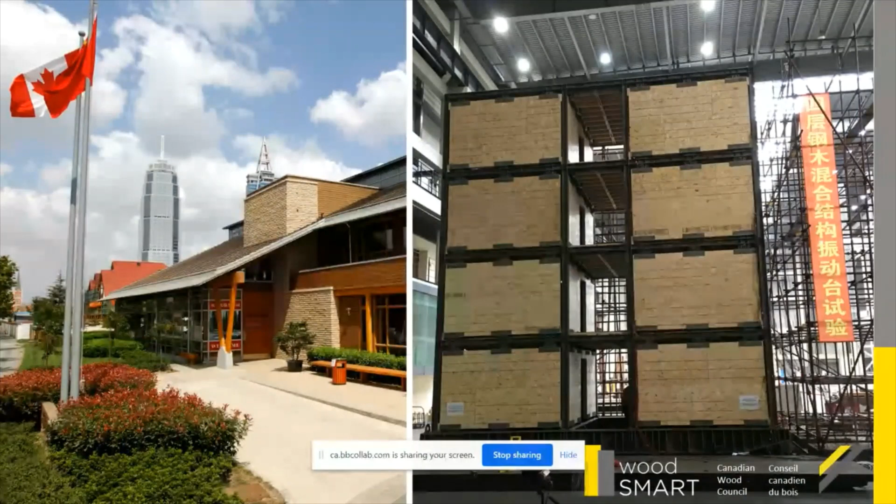I also had the privilege of living and working in China for a number of years. When I first arrived in China, I worked for an agency of the BC government that had built an office in Shanghai. You can see that on the left side of the screen. Basically, we were promoting the use of wood in China and encouraging Chinese to buy Canadian lumber. So that was pretty exciting.

Today, China has many examples of both leading edge mass timber projects, like the Qingdao Pearl Visitor Center, which I'll talk about at the end of my talk, and very basic construction in the form of bamboo scaffolding. You can see on the right side there, just bamboo lashed together with wire. It's simple but effective.

Also, while I worked in China, I was employed by a Finnish company that produced engineered wood products in Finland and sold them all over the world. They produced glulam, plywood, LVL and sawn lumber, and they're quite a large manufacturer. While I worked for them, I became quite familiar with how they constructed with wood in Northern Europe. So I've been fortunate to have seen wood construction in different parts of the world.

So for my presentation today, I thought I would start by talking about the current trends in the construction market overall, then talk about some projects in Europe that demonstrate industrialized construction processes, and then I'll talk about some projects in Canada.

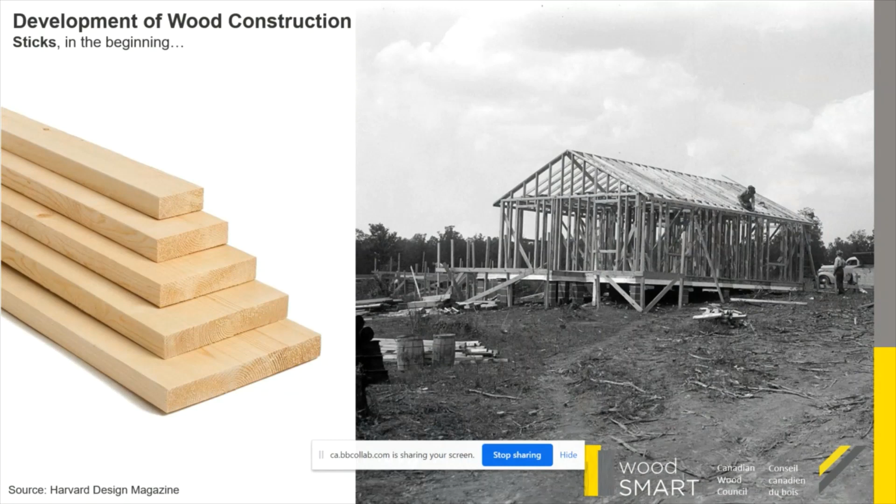Things advanced a little further from just sticks to panels, wood-based panel products like OSB, or oriented strand board, and plywood. And this enabled more complex structural systems like shear walls and floor diaphragms, and combined with engineered wood products, has enabled increasingly larger and taller wood structures, as well as increased their performance.

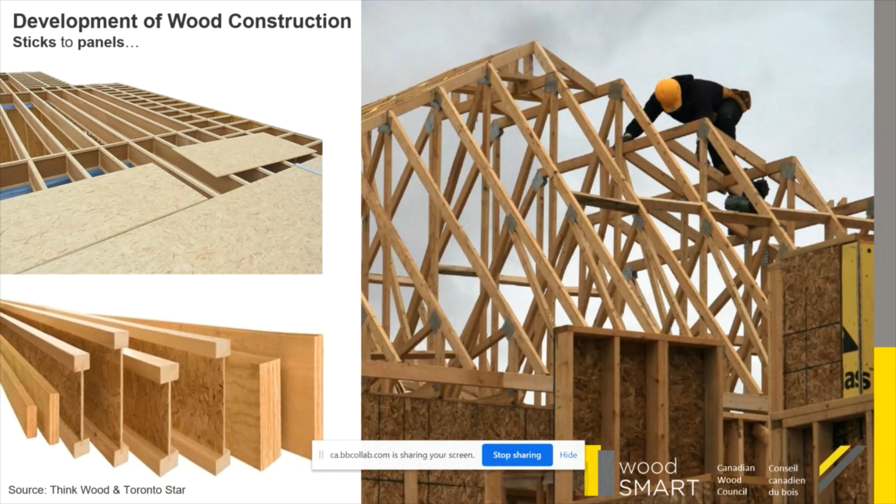And now we've advanced even further with mass timber elements. So these are things like glulam, where dimensional lumber is glued together in a number of layers to create a kind of homogeneous member, and cross-laminated timber, which is kind of a buzzword these days, which is dimensional lumber in alternating layers that create these large panels. Similarly, dowel laminated timber and nail laminated timber can create these large panel elements.

And so this is great because they can act like large plates, and in some instances can have two-way capacity if required. Highly processed products where the naturally occurring defects in wood, like checks and splits and knots, can be controlled and removed. And the quality of the finished product can really be assured.

These can also come in the form of large elements that are made in a factory to very tight tolerances, and they can have holes to accept connections, like you see on the right side there, and also have holes and routing for MEP to be installed on site, so you don't have to do that ad hoc on site. And these elements can be craned into place.

Shipped to the job site and craned into place immediately, and suddenly you can erect the floor of an office building in 1 week. No formwork is required. You don't have to tie rebar. There's not 100 concrete trucks disturbing the neighborhood. You don't have to wait weeks to strip the formwork and then reshore. So mass timber can really represent a new kind of construction.

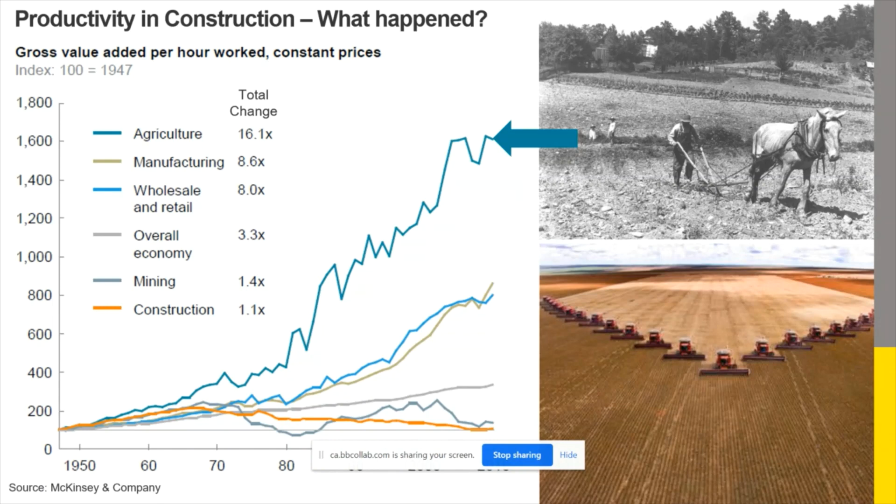So the blue line at the top there is agriculture. Productivity in agriculture has improved 16 times in 70 years. So you can imagine a farm in the late 40s looks vastly different than a farm of today. They've leveraged scale through land assembly and automation, and advanced bioengineering to increase crop yields.

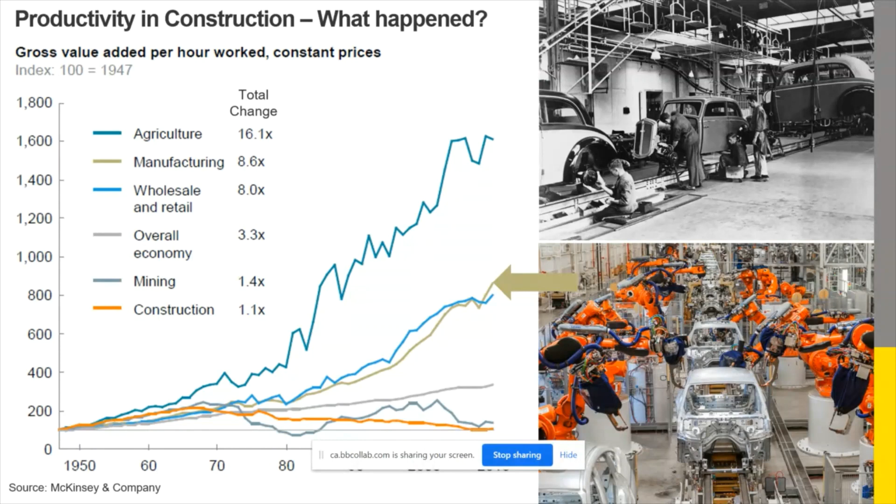Similarly, automotive manufacturing has improved almost 9 times. They've implemented new concepts of flow and standardized designs, and really aggressively automated to increase production capacity. So, an assembly line in the 40s, there were a lot of people, and it was quite slow. Whereas today, there's robots everywhere, and it's quite a fast, efficient process.

Likewise, retail has improved about 8 times in productivity. Walmart today is vastly different than 1940s Walmart. We think of cutting-edge logistics to provide affordable goods to the masses, online shopping, and other changes.

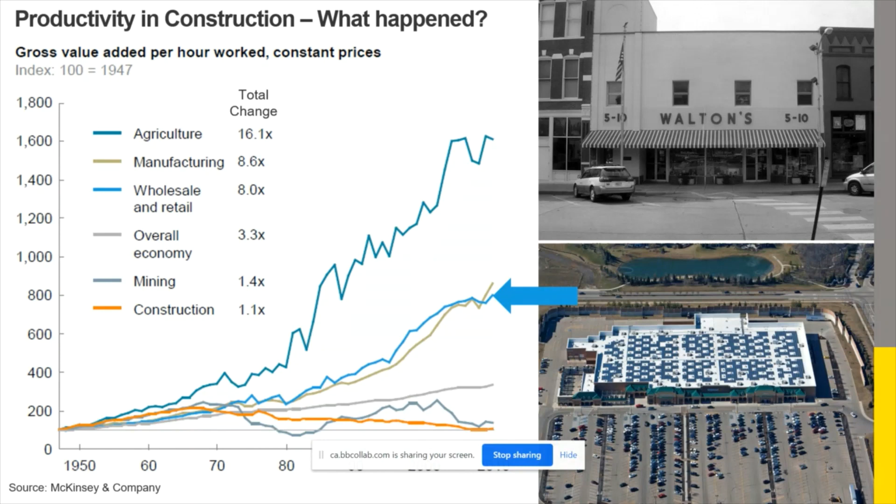Meanwhile, construction, the orange line at the very bottom, has improved only 10% in the past 70 years. And most of that advancement was between 1947 and 1970, likely because of the introduction of power tools and equipment to the job site. So think electric drills and pneumatic nail guns and things of that nature. And since 1970, it's actually declined in productivity. So it's almost embarrassing.

And for context, we can consider the Empire State Building, the design, planning, and construction of which took just 20 months from preliminary design to occupancy, and the actual structure itself was erected in only 410 days. Using a crew of about 3,400 people each day, they assembled its skeleton at a record pace of about 4.5 stories per week, using kind of an assembly line process, and the project was finished ahead of time and under budget, which is pretty rare these days.

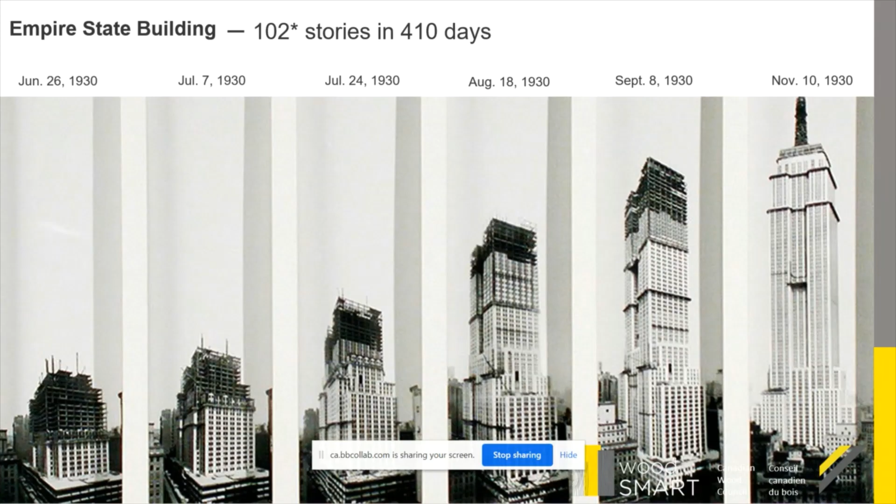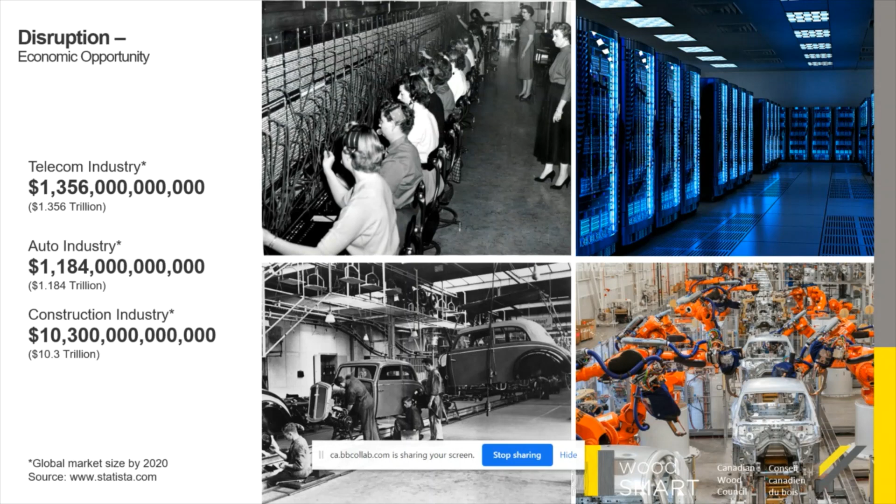And it's important to remember how inefficient construction is when we consider the size of the market. Globally this year, the construction industry will be worth about $10.3 trillion, about 4 times the amount of the auto industry and the telecom industry combined. So it's a huge market, and there's a lot of money to be made, and not a lot has changed in well over 100 years to make it more efficient and make it better. And really that means there's huge economic opportunity, especially if you can figure out a way to build faster and a way to build smarter, really more efficient.

And so what's really interesting is that we're now seeing tech companies taking notice of this vacuum of advancement in the construction sector, and they see construction as a market that is really ready for disruption, because in the tech industry things are constantly changing and evolving almost overnight. We get a new iPhone every year, and things are constantly improving, and the tech industry can't believe the construction industry is doing things the same way they did 100 years ago. So now, big companies like Alphabet, who have a lot of money and capacity and influence, are getting involved because they see a huge economic opportunity.

And what's further interesting is they often recognize wood as the backbone of the platform in changing the construction industry, and not just because of its environmental benefits, but because wood lends itself very well to more efficient, industrialized construction. And so we're seeing startup companies like Katerra, which is based in Silicon Valley, and whose CEO used to run Tesla for a bit. And Katerra wants to change construction through technology. The construction industry is actually one of the least digitized major industries. And there's a correlation between digitization and productivity. And so they want to change that and bring technology in and kind of invert the process.

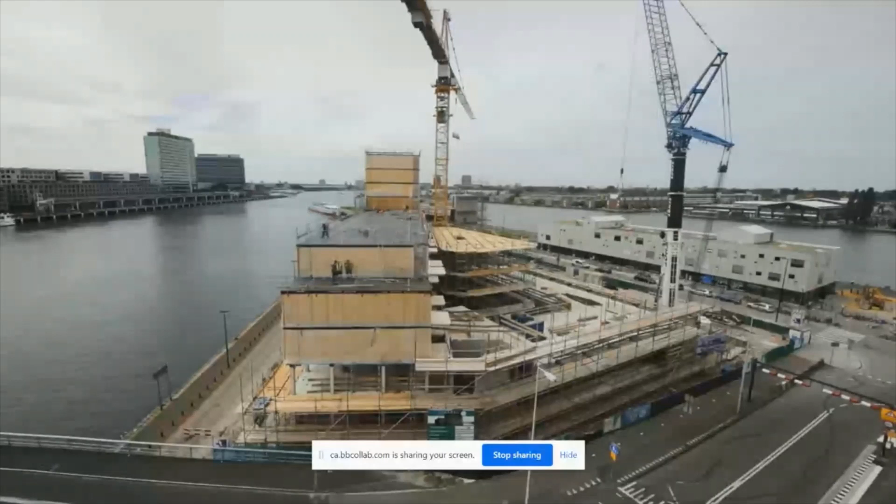And so we see on the horizon a paradigm shift in construction from its current state to a more industrialized process, incorporating the concept of design for manufacture and assembly, which is an approach that focuses on the ease of manufacture and the efficiency of assembly. Basically it's a systems approach where the structure is designed from the very beginning with the intention of being prefabricated offsite and then assembled on site like a kit of parts. So you think kind of like flat-pack furniture.

That video you just saw was a hotel in Jakarta, and it's a good example of modular wood construction. It's a 9-story luxury hotel built in just 2 weeks using 176 CLT modules.

So anyway, I think it's imperative that future architects and engineers, technologists, and builders have knowledge in wood, because construction is changing, and also because we need to build a lot of new infrastructure. Globally, it's predicted by the World Bank program of the UN that we'll need housing for about 3 billion people in the next 10 years. And that's the equivalent of about 300 million new housing units that we'll require.

And to meet this demand, McKinsey & Co., which is a global consultancy, estimates that about 15 to 20% of all construction in US and Europe will need to shift to modular or offsite processes by 2030 in order to meet that demand. So this is a huge potential opportunity for wood, given its desirable characteristics in these types of applications.

So anyway, to illustrate how this shift to industrialization could happen, I'll show you a snapshot of the current state of wood construction in Europe, and talk about how they use wood, specifically in Northern Europe, where a lot of prefabrication and offsite construction technologies are already being employed and being developed further each day.

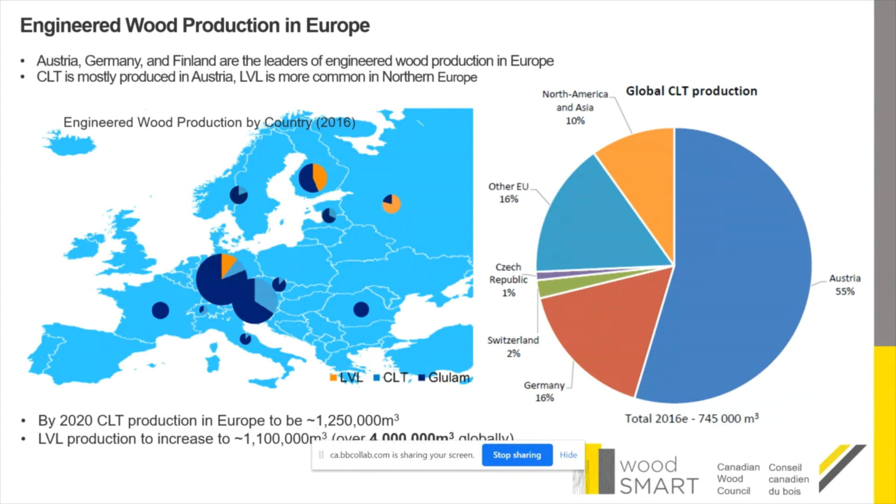And there's basically 2 types of LVL. So there's the standard type, or LVLS, which is commonly used for beams or joists or columns. LVL is made up of these small plies that are glued together, and so all the plies are in the same direction. The other type of LVL is LVLQ, it's a cross-bonded LVL, and 20% of the veneers are perpendicular. So it creates a 2-way capacity, and this product's commonly used for panels, for shear walls, or plate kind of applications.

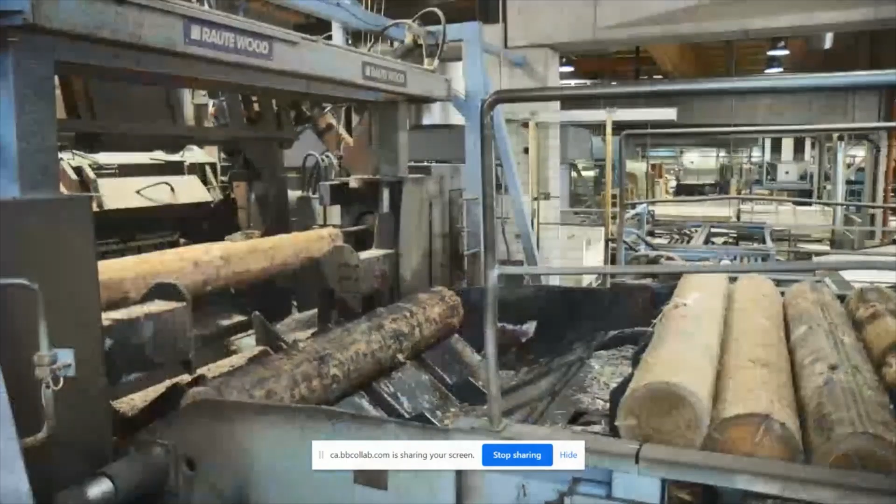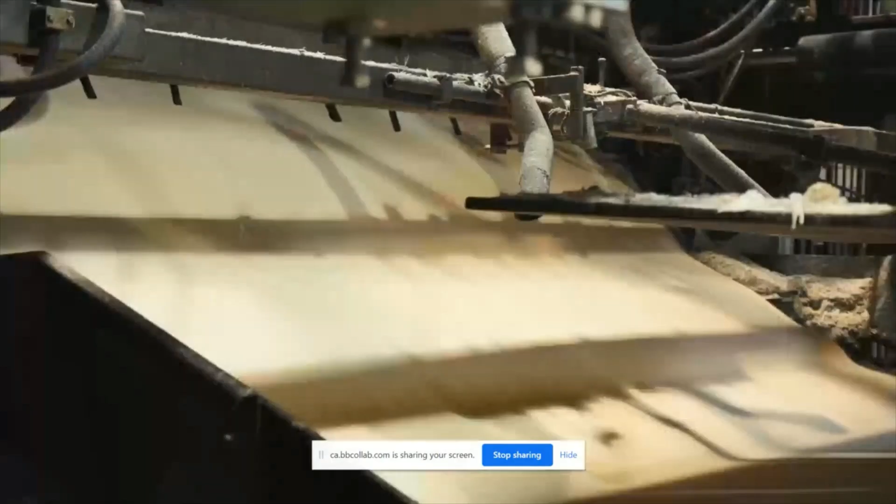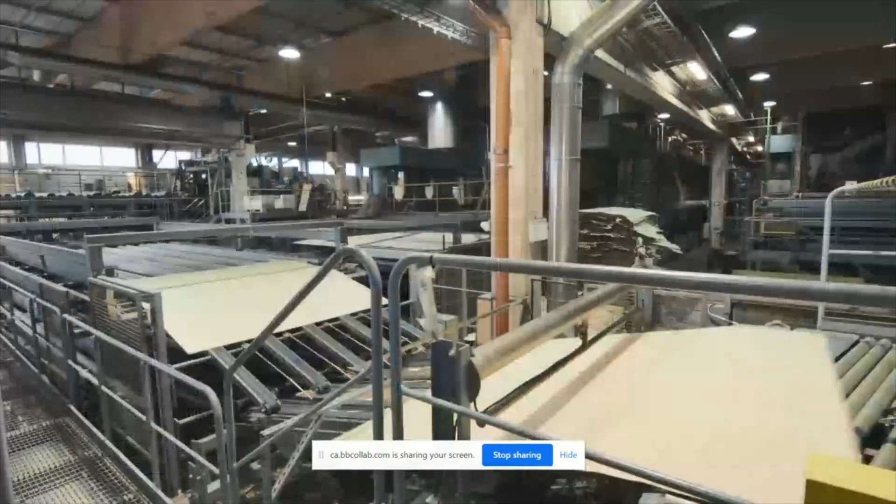So this is a video of the production of LVL, so an LVL mill. So it starts with logs that are peeled. They take 2.5-meter logs and then they peel them with a lathe, and they create this 3-millimeter thick veneer. They kind of unwrap the log. And then they dry it to a very low moisture content. So the wood shrinks because as it loses moisture, it shrinks in dimension. And they're able to grade each veneer. So they look at where the knots are and the checks are, and they can remove those defects if needed.

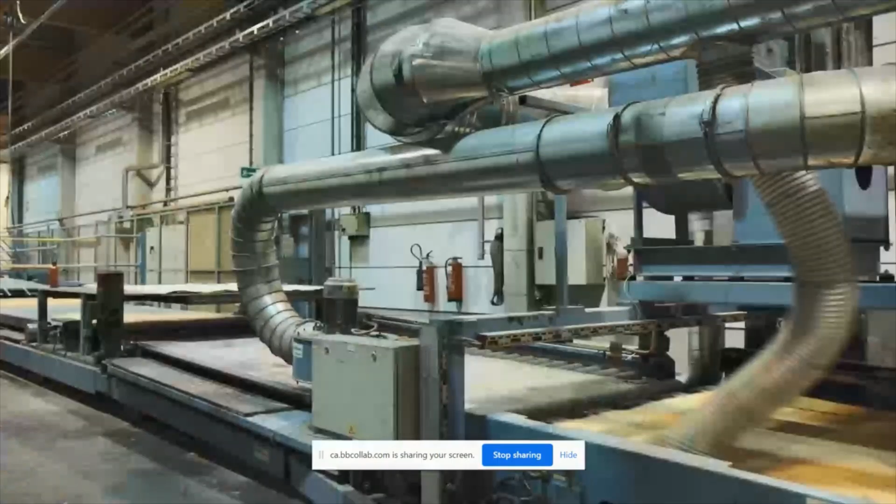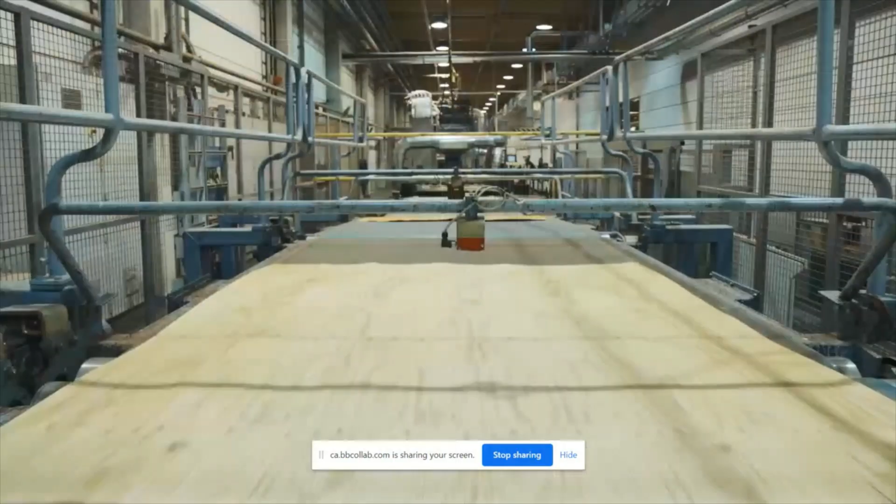And then it goes into a lay-up process here. So they add glue, so it's a phenolic resin. And they add glue to each sheet, and then they lay it up in a continuous assembly. So once all the layers are added, they put it into a press and add heat, and that allows the glue to cure, and then you have this really long continuous billet of solid wood. It can then be cut into different widths and lengths,

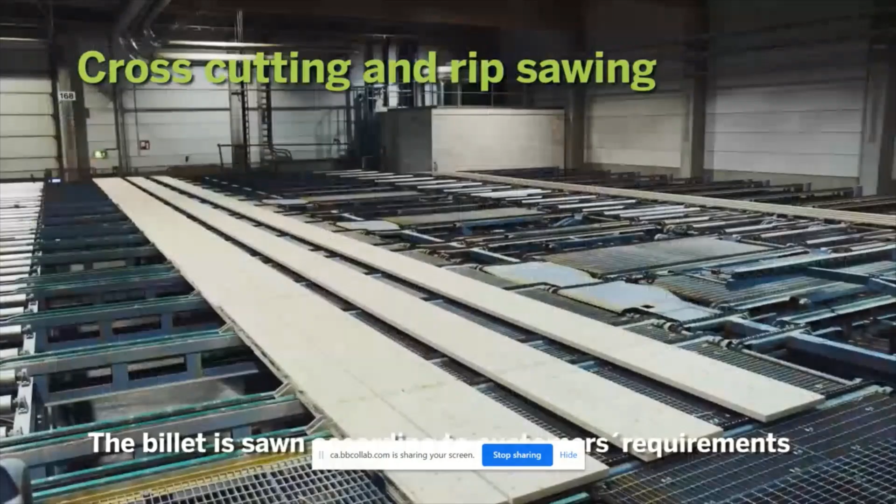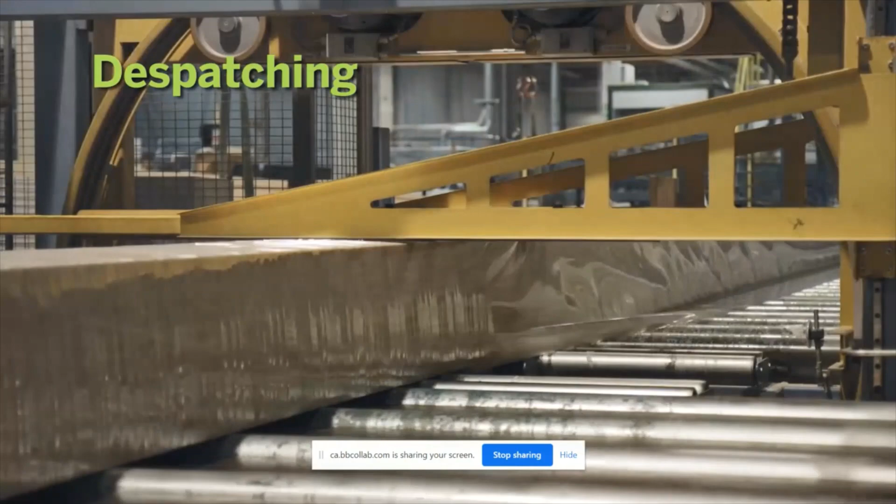and packaged accordingly. So it's just a good video to see that these are really highly processed materials. It's not like a 2x4 where there's defects that can't really be controlled. This is a very highly processed product, and because of that processing, you can really control the quality.

So over the past 15 years in Northern Europe, they've taken these LVL components because they're very precise and the quality can be assured, and they've begun creating prefabricated components, ready-made elements that are made in a factory and then shipped to a job site to be installed. So one of these prefabricated elements is called a stress skin panel, and it's completely made from LVL. It's typically used for floor and roof systems.

They're very lightweight and they can achieve really long spans, especially for their weight. And again, they're made in a factory, very exact dimensions, very tight tolerances. So there's very little waste and few errors on site because they can control the quality and control the product.

So there's 3 different typical configurations for stress skin panels. The first is a rib slab. So they all consist of an LVLQ or cross-bonded LVL top panel that's structurally glued to standard LVL webs. And that's typically used for non-insulated roof structures. The second is a box slab, which is similar, just it can be insulated easily in a factory.

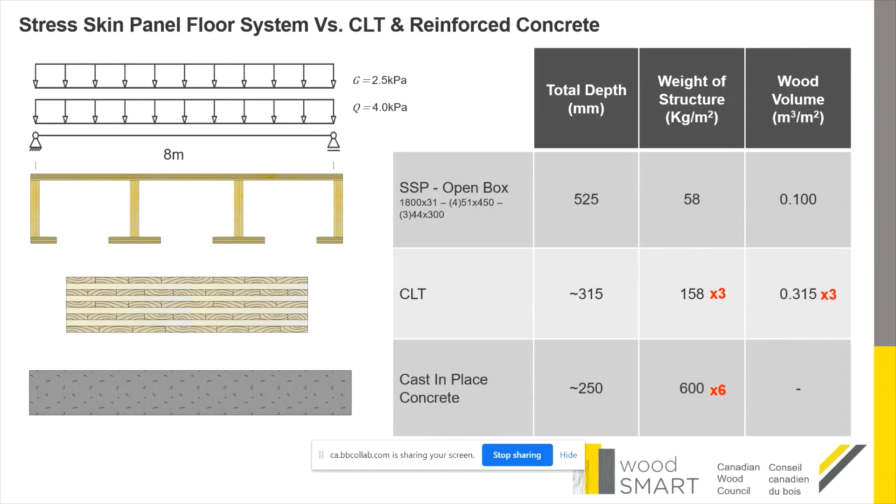So very lightweight compared to CLT, which is great for many applications, but for long span floors, it's not great because again, it's a solid section, so it's not a good use of material, and it can get quite thick. So CLT to do the same span would be about 3 times the amount of material and 3 times the weight. Cast in place concrete, although it would be thin, would be very heavy. It's over 6 times the weight per square meter. So you can see here just how effective this type of system is.

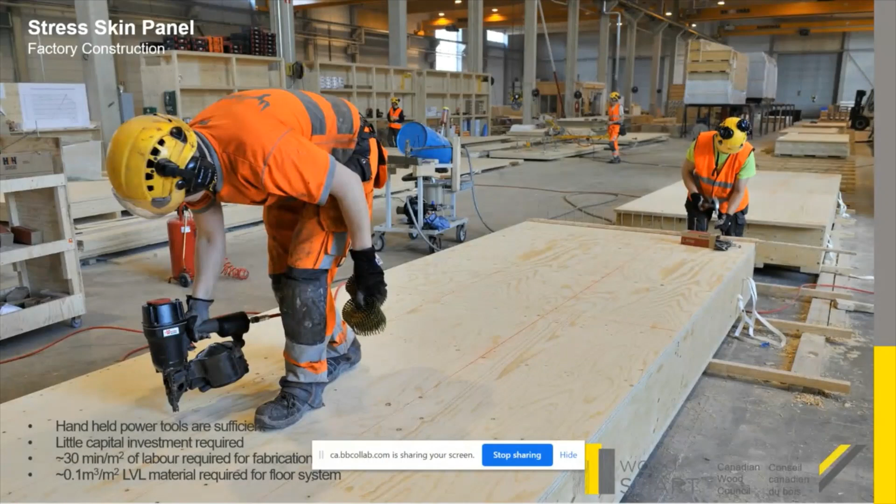They're very easy to build in a factory environment too. Not a lot of overhead or capital investment is required. Simple handheld power tools will do, and it usually takes about 30 minutes per square meter to assemble the panels. And again, everything is very accurate, and comes within 3 or 4 millimeters of tolerance.

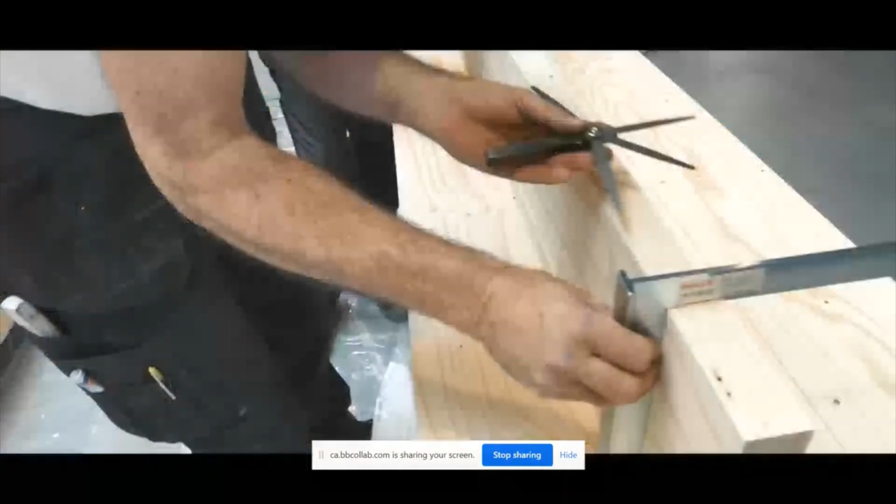This is a video of a company based in Belgium that has a semi-automated assembly line for stress skin panels, and they typically use them for low-rise commercial applications, so warehouses and factories, and that kind of nature. So you can see that they're applying glue there, polyurethane glue. Then they use a vacuum lift to install the top panel.

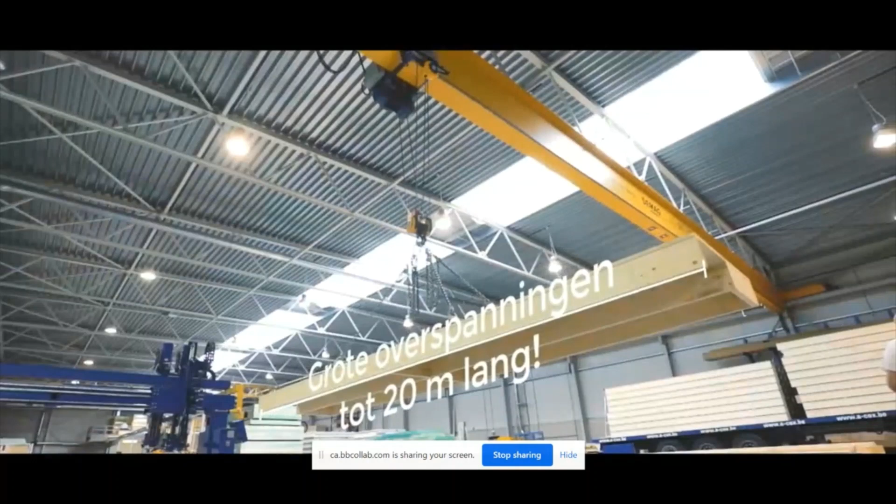And then they nail it down. The nails provide a clamping force until the glue dries, and then after that, the glue is doing all the work. The nails are not needed for any structural means. They install devices to allow the panels to be lifted. You can see they're quite large. That one's 20 meters long. It's probably about 2.5 meters in width. And again, lightweight.

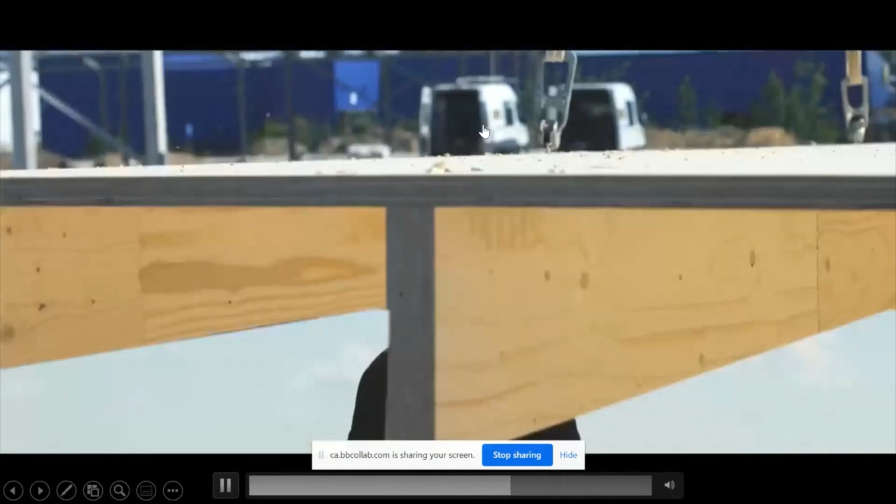Sorry, are we having trouble hearing me? I hope everyone can hear. Reed, after you actually turned off your video, it's okay. Yeah. I guess it's okay for most of the students. I guess Mario has some specific problems, so I guess we are good actually. We're good because I could use a microphone if it's too bad, but I don't know. That might be Mario's internet connection problem, because the rest of the class can hear you. I can hear perfectly. Okay. Do you want me to try a microphone or just keep going how I'm going now? I think we can keep going because I guess it's the one system problem. Thank you. Okay, perfect.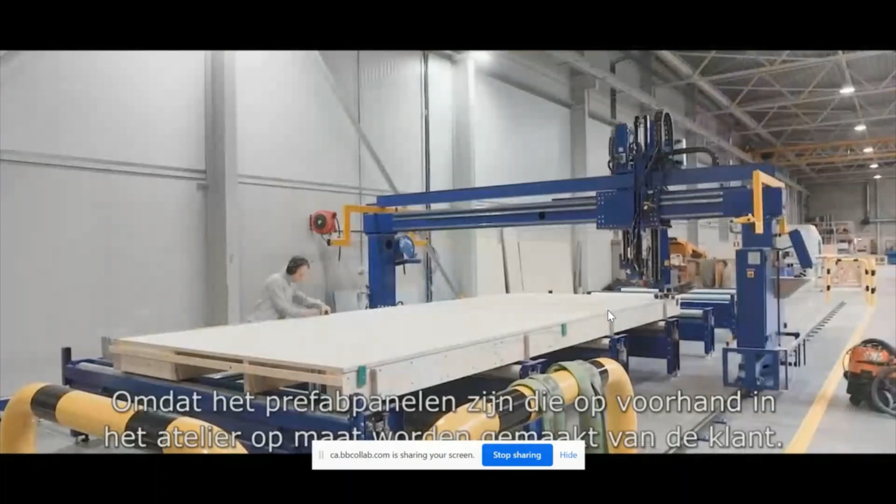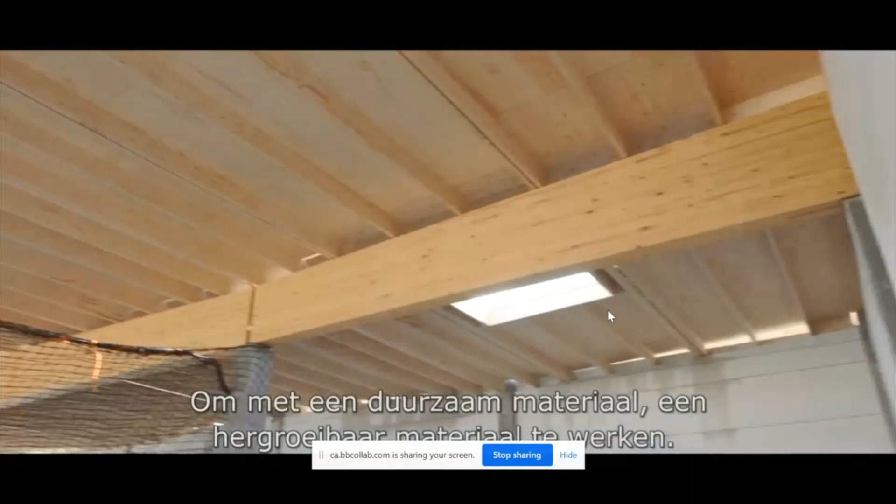Sorry. So anyway, these panels are put on a truck and taken to the job site. And if you speak Flemish, you can follow along with what he's saying. They're easy to join together just with screws. And again, it's a very easy and efficient assembly on site. So that's really the major benefit, this systems approach or a kit of parts, where you try and take as much work off the job site as possible, and you do it in a factory. I've heard it said before, you wouldn't build a car in your driveway, so why not build a building in a factory? It just makes sense.

Another application, this is a warehouse and logistics center in Finland, just outside Helsinki. It's a company called DB Schenker, which is like a DHL or a FedEx type company. And so it's a 12,000 square meter facility, which I guess is 120,000 square feet. So pretty large facility. Glulam post and beam structure with a stress skin panel roof system.

And so the grid on this building is quite large. It's 18 meters that the stress skin panel spans, and then a 15-meter glulam beam span. So it's quite large considering there's pretty heavy snow load outside Helsinki, probably 50 to 60 pounds a square foot. So pretty good grid spacing.

And really, this type of structure was selected by the general contractor for the speed of construction. So the whole wood structure was erected in just 10 weeks and completely waterproofed. So it was a very fast assembly. And the quicker you can get the building up, the quicker it can be occupied and go into service. So it saves time and money for everybody.

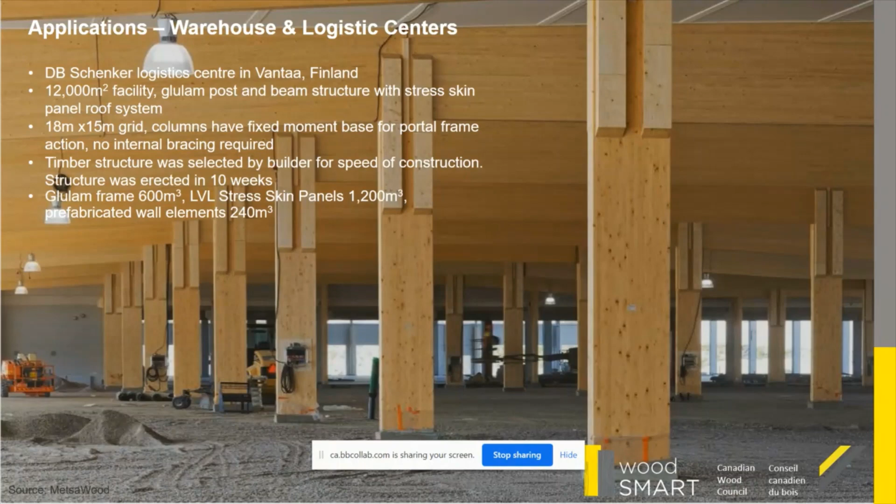Being that it's a logistics center, they didn't want any cross bracing or interior shear walls, so all the columns are moment connected or fixed connected at the base. So they're really large, and it creates kind of a portal frame, so they didn't need any cross bracing. So it's just an interesting application.

So the next step in industrialized wood construction is to basically increase the level of off-site construction. So this includes not just making prefabricated elements that can be shipped and installed on site, but completely finished modules made in the factory and finished in the factory, so that basically no other work is needed on site. There's a company called Cisco, again based in Finland, that is doing this kind of work. And they're basically building apartment buildings using this kind of modular process.

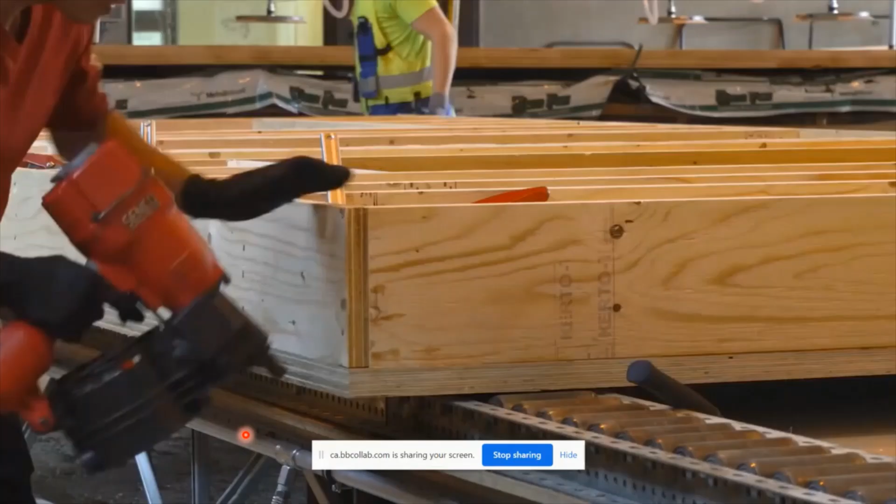And so there's a video of this process. So they basically take the different elements, pre-made wall elements that you can see here. Again, this is all LVL components; they typically tend to use LVL or other engineered wood products just because of how precise they are in terms of dimensional tolerance. Sawn lumber can sometimes have a lot of differences in dimension, and not every one's the same. So using engineered wood products ensures the quality.

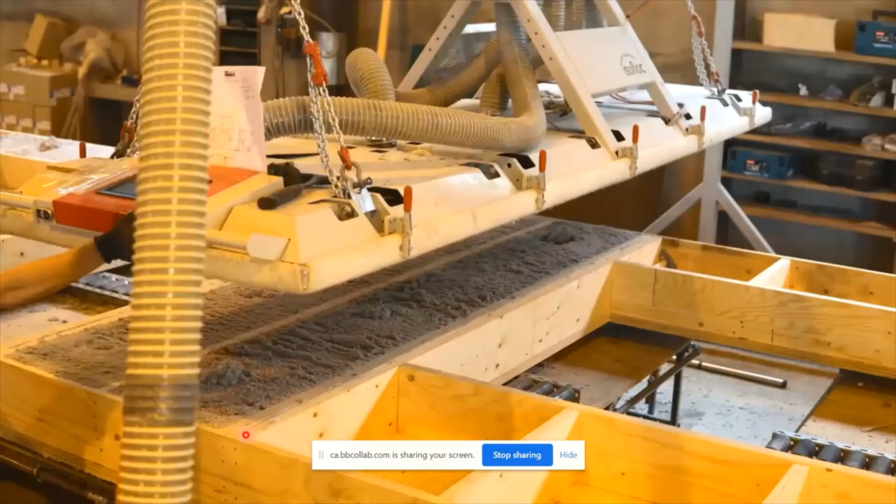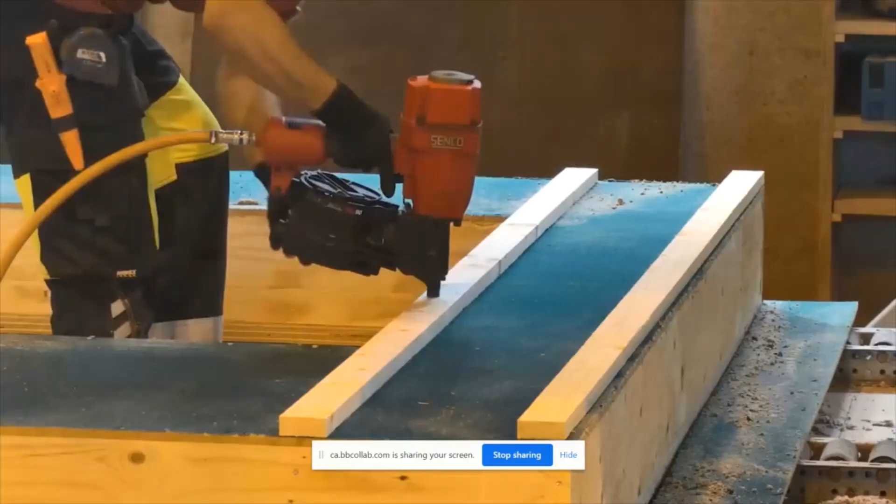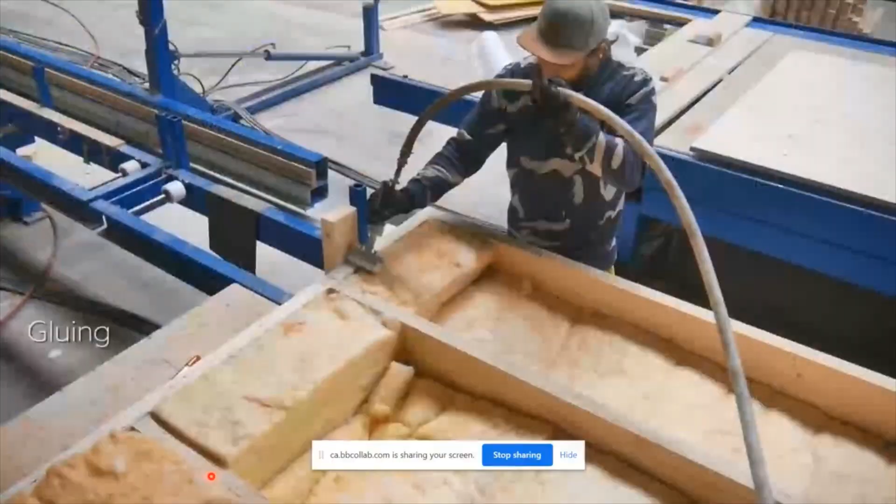So here you can see the wall panels being made, and it's quite deep wall assembly, so they can fill it with insulation. It's very high thermal values. And they create the floor elements, which are stress skin panels. So this is kind of a more manual process. They don't have the automated line. You can see applying the glue to glue the elements together. And again, installing the top panel and nailing it down just to provide a clamping force for the glue to dry.

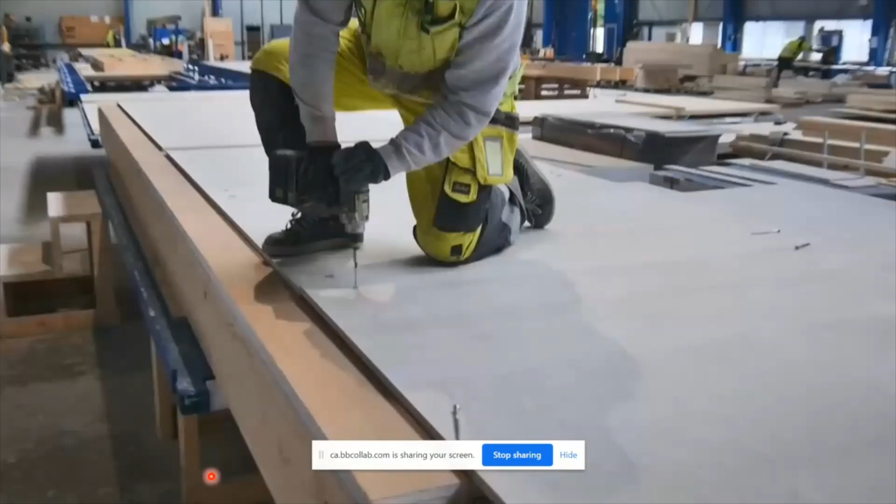I see Theodore, right? Canada does have a lot of catching up to do.

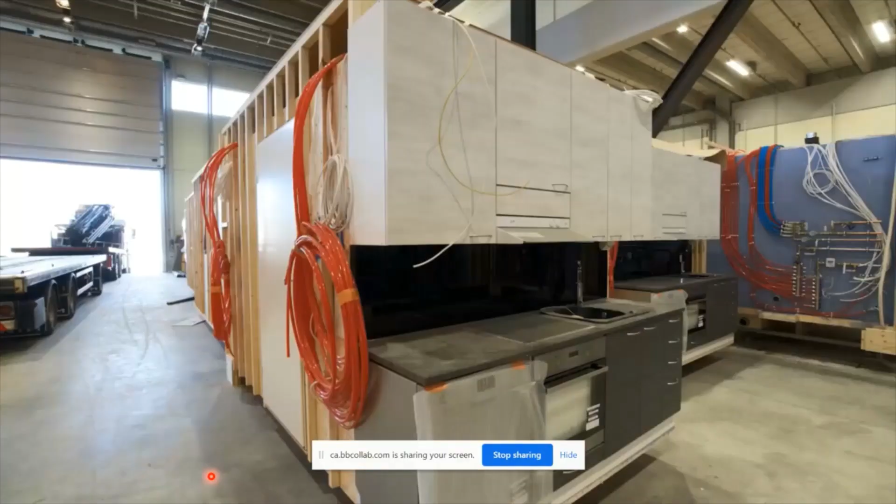So this is the bathroom kitchen pod. So it's all made of LVL. All the mechanical, electrical, plumbing is plug and play. So it's all done in the factory. You can see here the waterproofing and tiling being installed in the bathroom. So there's the finished kitchen bathroom pod, all the fixtures installed. Basically now they take these ready-made elements and put them all together in the factory.

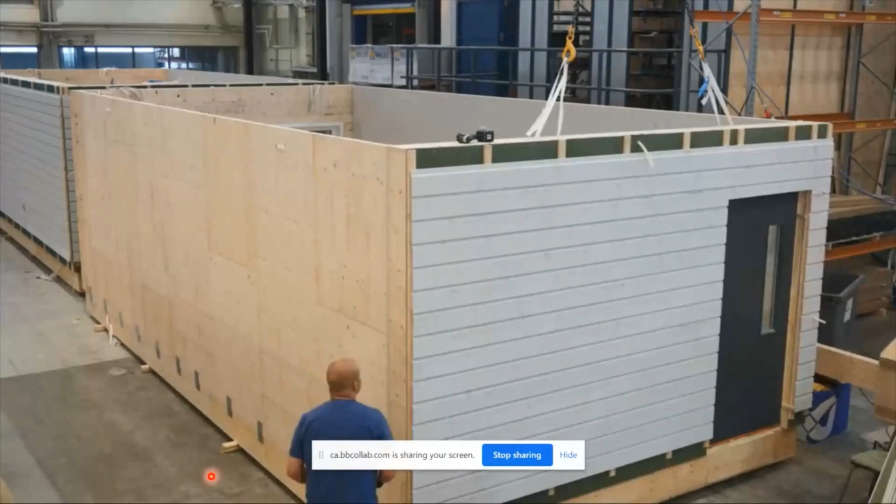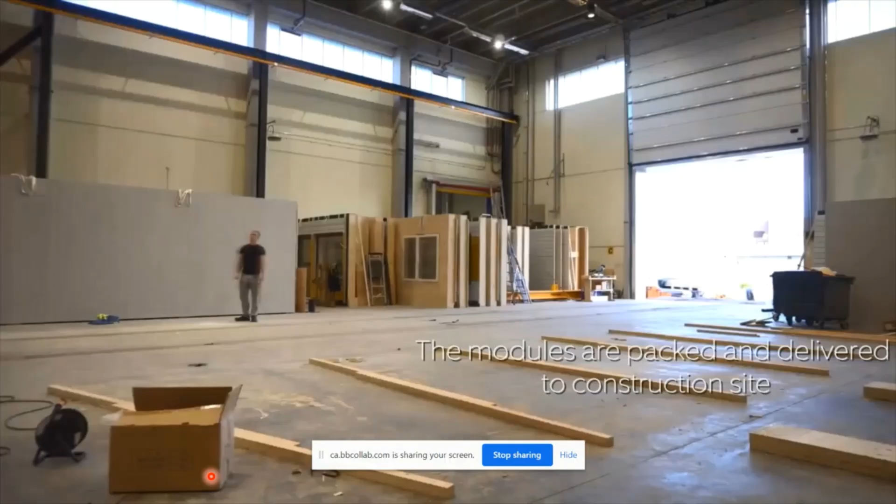So they've just installed the bathroom pod there. And now they're installing all the gypsum board, all the cabinetry, the appliances. It's all done in the factory. And they seal it up and put it up. It takes a nice drive through the Finnish countryside here.

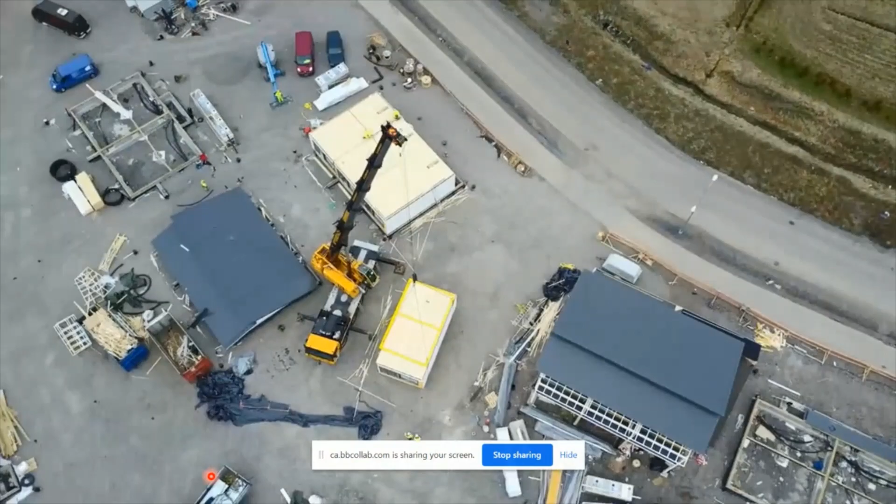So it arrives on site and the concrete foundations have already been installed. They just lift it off the truck right into place, connect the modules together. It takes 6 days in the factory to build each module, completely finished, and then basically 1 day on site to install them, connect all the services together. So it's very fast, very efficient. Basically it's occupied 1 month from the day that the modules arrived on site. So it's a very, very efficient way to build housing and comparably quite affordable as well.

So moving on, this is a different typology altogether. This is more of a specialized one-off project. This is the Metropol Parasol in Seville, Spain. It's one of the world's largest wood structures, and it's created by 3,400 interconnected LVL elements. And it was completed in 2011.

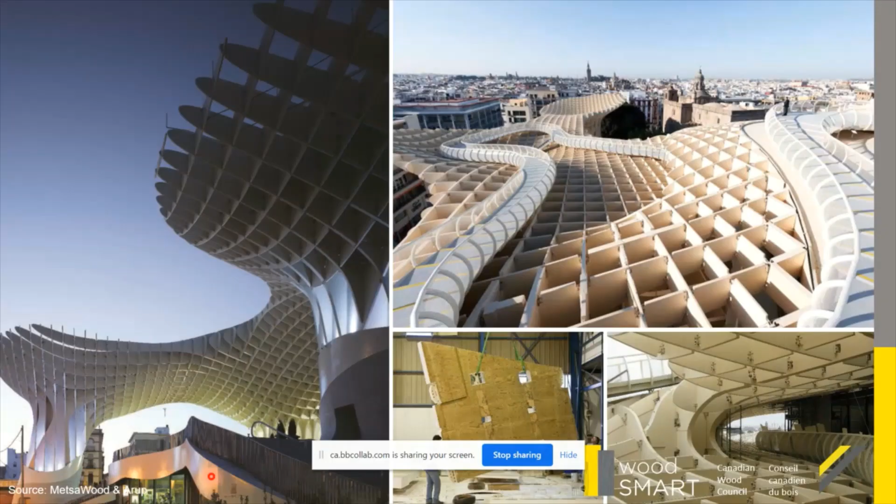The structure itself is about 75 meters long, 50 meters wide, and about 30 meters high. And it covers a huge public space. So it's not just a sculpture; it can be occupied. You can go up on top of it, and there's bars and restaurants, and this meandering path along the top that tourists and others can go and check out. So it's a pretty neat structure.

You can see here it's basically created by a grid, an orthogonal grid, 1.5 meters wide by 1.5 meters, and it's supported on 6 kind of tree-like columns. So the 2 main ones are reinforced concrete, and then the 4 others are wood. And you can see on the right side of the screen there, kind of the 2 orthogonal directions.

So of the 3,400 pieces used to create the structure, no 2 are alike. So they're all unique and kind of have this interesting curvature. So it would be very difficult to make these shapes using any other material. And so basically they used a cross-bonded LVL

product. So they took rectangular billets and then CNC'd them with a robot, a KUKA robot, and you can see there on the top left, you can get a bunch of different pieces from one rectangular billet, and then you can see, for context, there's a worker operating a crane, and comparably to the piece, it's quite large. So these aren't small pieces.

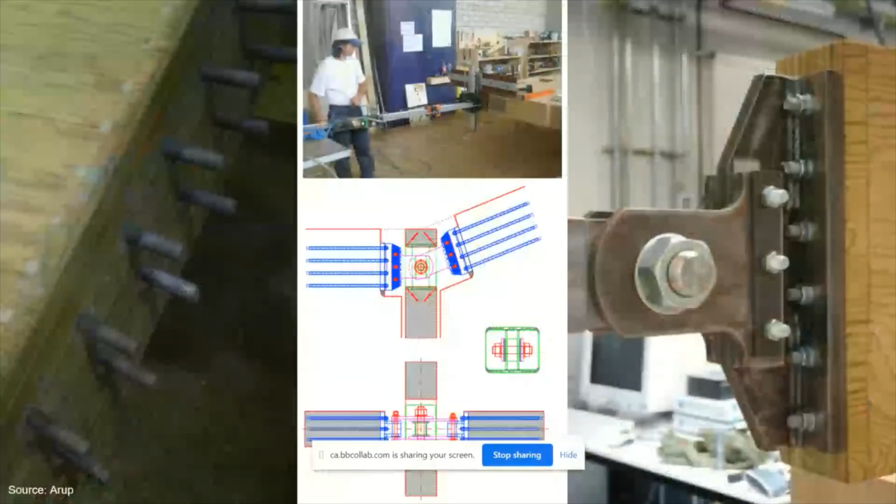One of the really neat features of this is how they connected all the different components, because the 3,400 different pieces were all kind of intersecting each other. So they created this unique kind of moment connection. So it was achieved by drilling holes into the ends of the LVL about 2.5 feet deep, and then they'd epoxy in steel rods.

And it's a very strong connection. So if you were to try and pull out those steel rods, the steel would yield and break before the connection to the wood would fail. So it's a super strong connection type. And again, being embedded in the wood protects the steel from fire. So in the event of a fire, the wood would char and protect the steel. Because when steel gets hot, it gets weaker.

And it's obviously exposed to the elements, so to protect the wood from UV and rain, they coated it in a polyurethane finish, and basically this is going to allow the structure to last at least a 50-year service life. So it's not like it's a temporary installation.

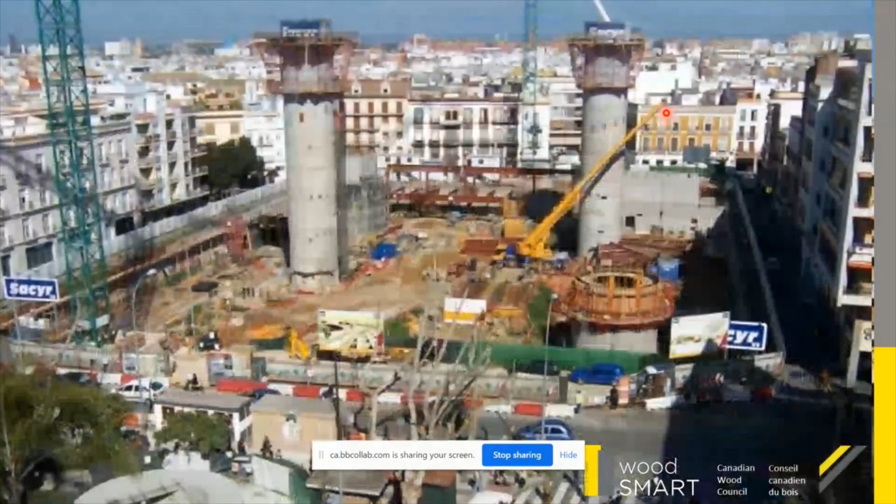Two pictures of the kind of construction sequence. So the site itself was a very sensitive archaeological site. There's a lot of artifacts and very special sites. So they had very specific locations where they could put the support columns. You can see the installation of the two main reinforced concrete towers there, and some steel infill for the lower levels.

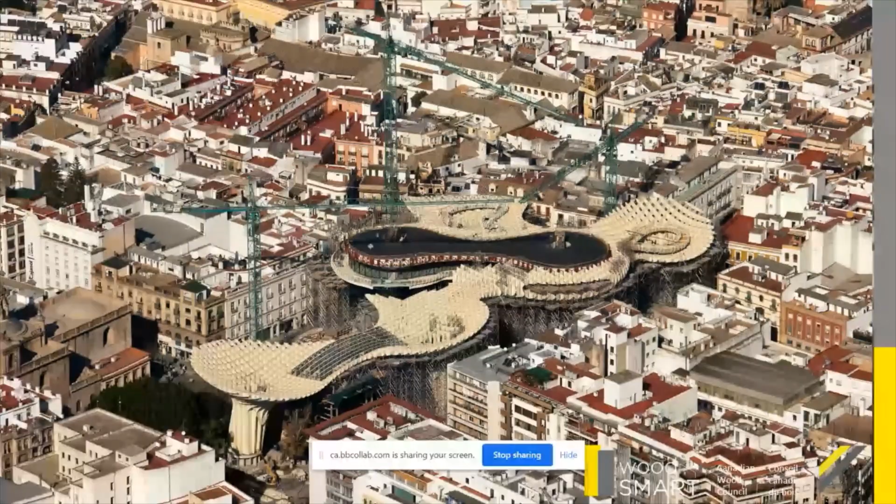The final product. So you could imagine how hard it would be to create that shape and all those different elements with material other than wood. So that's kind of a current snapshot of what's happening in Europe, and I'll shift gears and focus on North American projects, mostly Canadian.

And I say re-emerging trend because multi-story wood buildings aren't entirely new. Around the end of the 19th century, we built a lot of what's commonly called brick and beam buildings. So it's basically a masonry exterior construction with a heavy timber post and beam on the inside, and then that supports a mill deck, which is kind of 2x4s on edge nailed together.

And so Toronto alone has over 40 such examples of these brick and beam buildings, ranging in height from 5 to 8 stories. Now, if you walk up Spadina Avenue, there's many different examples of these buildings you can see. Liberty Village also has quite a few.

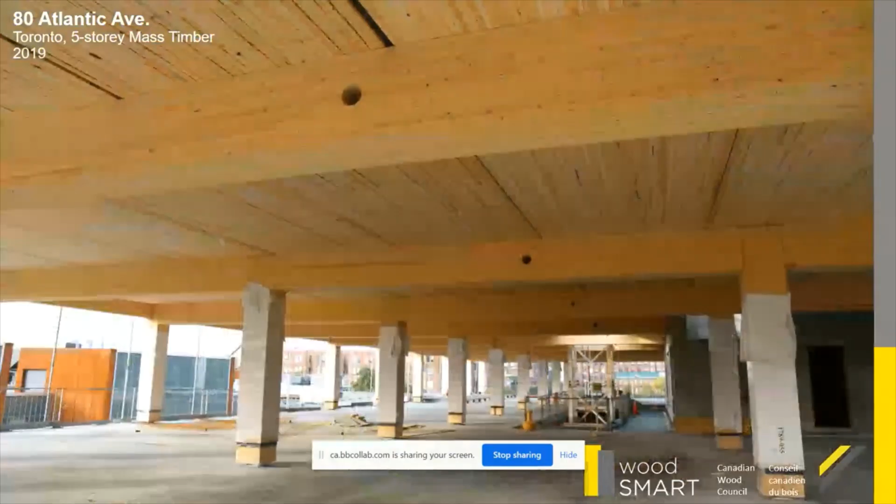It was just completed last year. It's a 5-story building with a glulam post and beam main structure. And the glulam, because it's a manufactured product, is very strong and stiff, so you can get really long spans compared to sawn timbers that were used 100 years ago. So the grid spacing on this project was 25 feet by 20 feet. So the glulam beams, I believe, are spanning 25 feet.

And in between the glulam beams is a product called NLT, or nail laminated timber. So basically it's just dimensional lumber. In this case, they use 2x8s on edge, and they just nail them together. So it's very straightforward, and it mimics the old mill deck that they used in the old factories. The panels here were 8 feet wide and 40 feet long. They're made in a facility in Barrie, just north of the city. And they're pretty lightweight, can be transported to the site quite easily and then just craned into place.

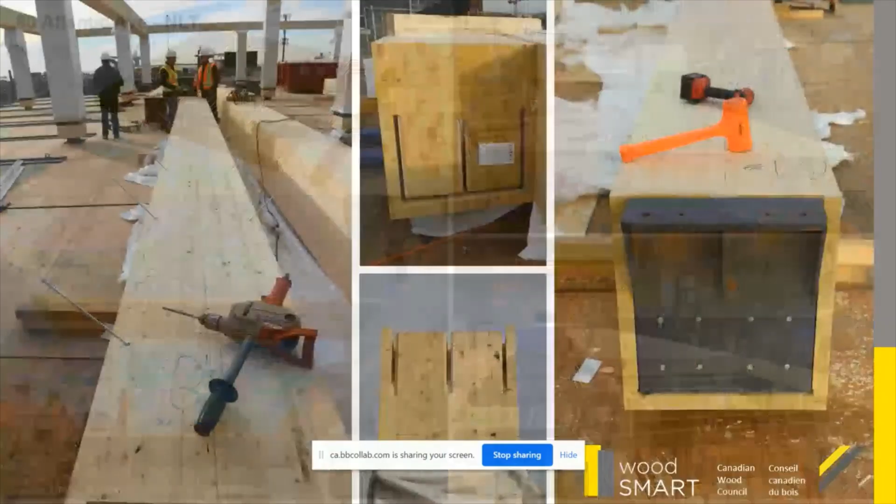Here we're just looking at the beam to column connections. So they're all pre-assembled in the shop. The glulam components, you can see they're CNC'd to accept the steel connection, which is, again, hidden from sight once the connection is completed. And again, that provides fire protection. So in the event of a fire, the wood will char and protect the steel from getting hot and failing. So the wood is actually protecting the steel here.

What I'll point out too is wood is much stronger parallel to grain compared to perpendicular to grain. So think of it as a bundle of drinking straws. If you're holding it in your hand, you can easily crush the straws. But if you were to put pressure on it end to end, it's quite strong. You wouldn't be able to compress it. So wood behaves in the same way.

The idea here is you want the columns going continuous end to end. So if the beam were to go right across the column, and then the column above would sit on top, the column above could crush the wood perpendicular to grain and cause settlement. So to avoid that, they have the columns come up and the beams frame into the side, and then they have these steel stubs that connect the columns end to end. So it's always something to consider, that wood's an anisotropic material, so it's got different properties depending on the grain direction.

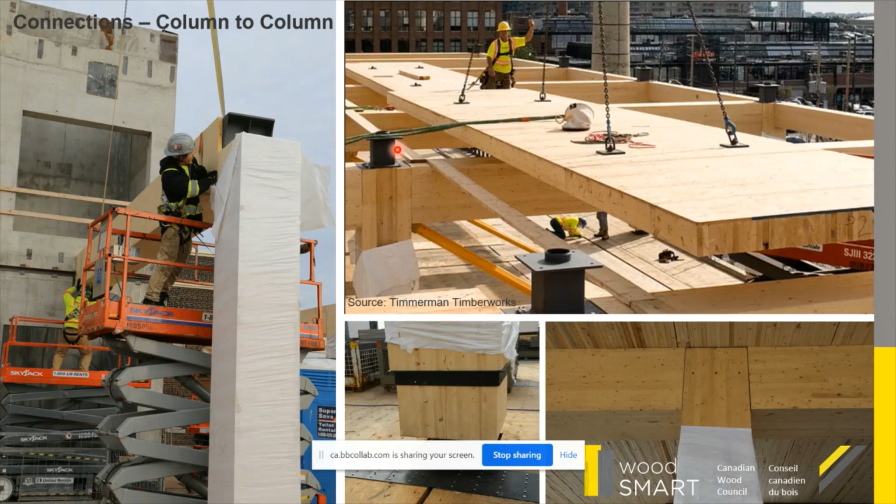Moving on, a second reemerging trend is tall wood buildings.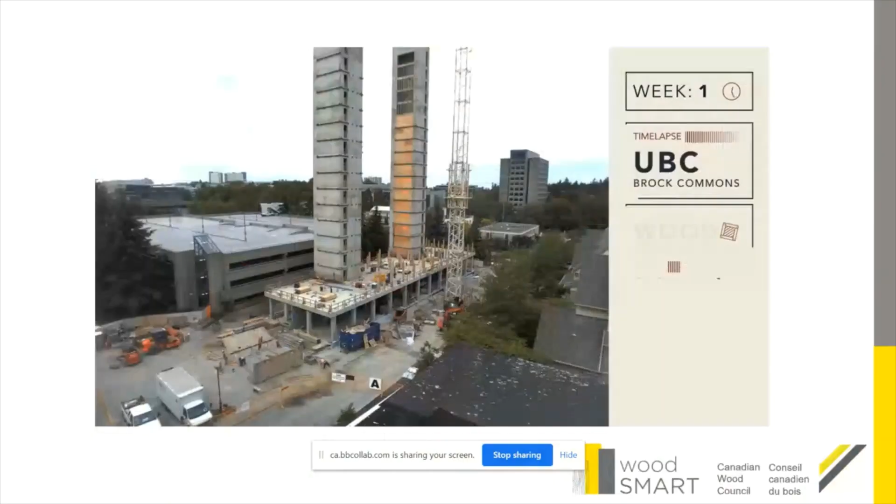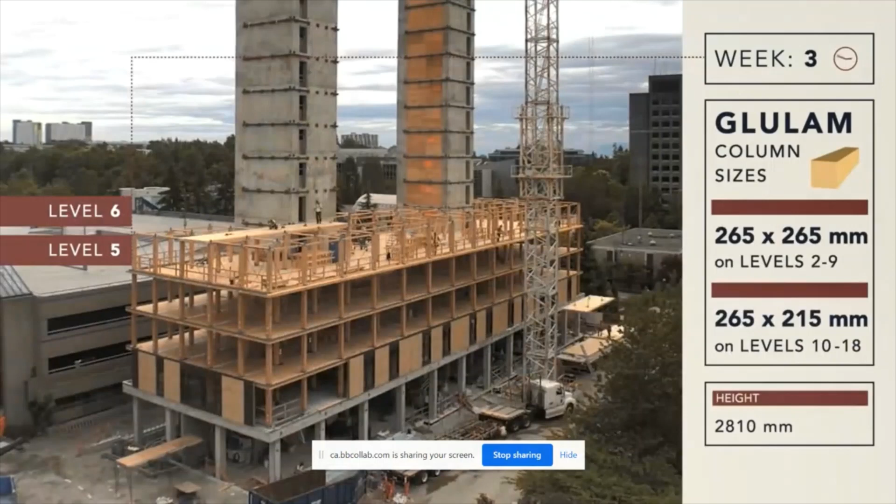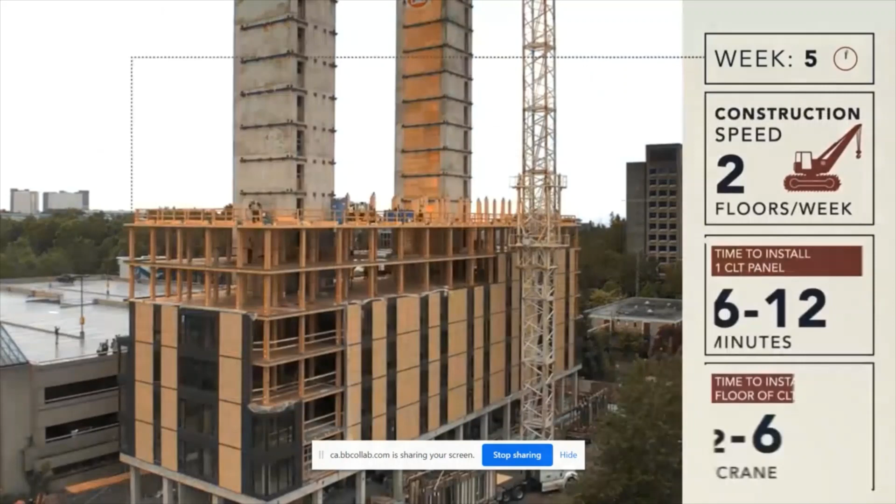I have a bit of a time-lapse video here, so you can see the first and second floor podium out of concrete there, and then the 2 concrete elevator cores for lateral systems. So it's all flat slab. The CLT's working in 2 ways, supported by glulam columns. So all the wood elements are pre-made, fabricated in a factory, shipped to the site, and the crane picks them right off the truck and installs them right into place. It's very fast. They're going 2 floors per week.

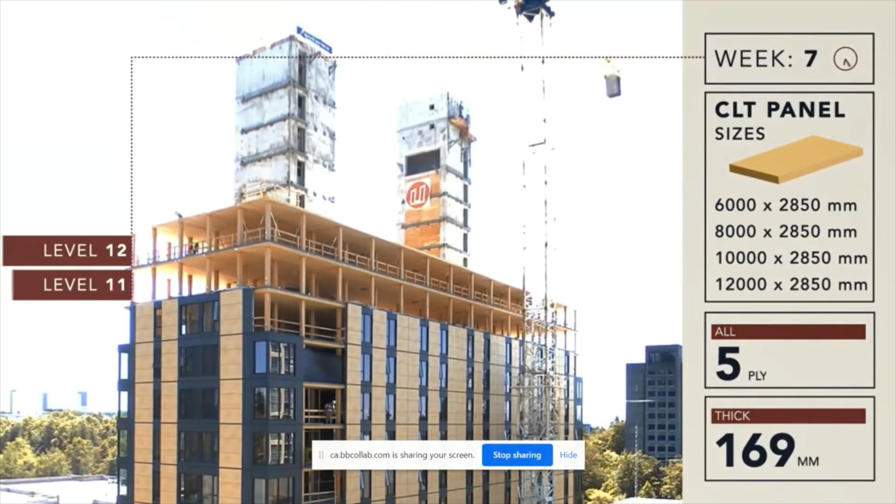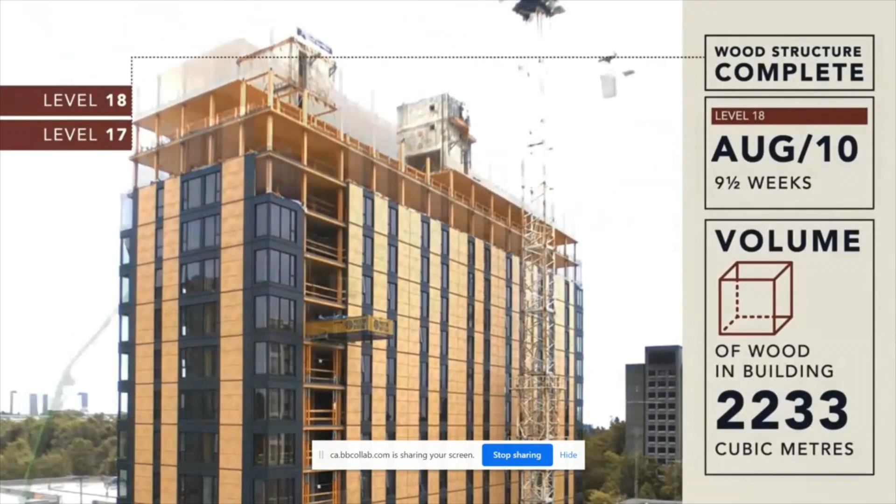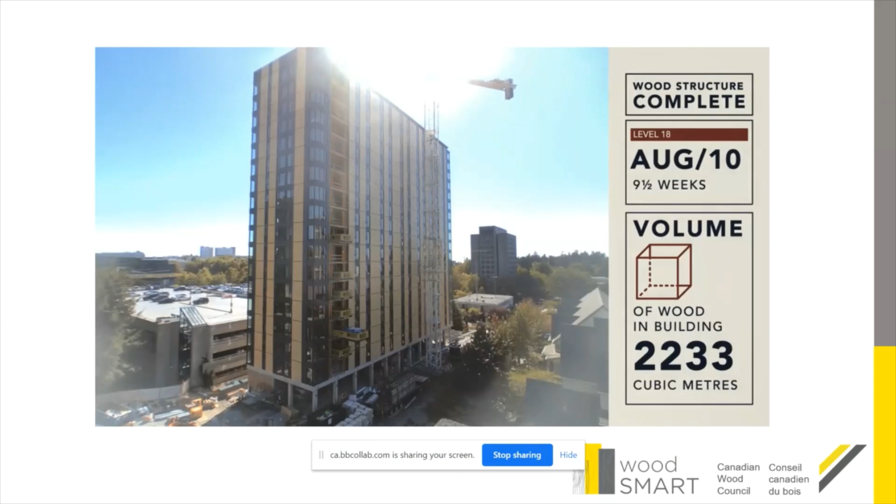And so a pretty impressive use of mass timber, and it used just over 2,200 cubic meters of wood. It's probably about 2,400 trees, and inevitably, when we talk about building more with wood, it leads to the question: if we build more out of wood, aren't we going to lose trees and lead to deforestation? And well, the answer is no, because wood for that building was grown in our forests in just 6 minutes. So we're not going to run out of trees anytime soon.

And actually, wood harvesting in Canada is quite sustainable. There's a lot of regulations that govern it, and strong laws and oversight. So any public land that's harvested has to be replanted and regenerated. Canada has 347 million hectares of forests. Less than 0.5% of that is harvested annually. Actually, we lose quite a lot more forests to insect attack and forest fires. Almost 5.5% of our forests are lost each year to those 2 things, where less than 0.5% are used for harvesting for wood products.

But 53 meters is quite high, and is a very successful example of tall wood buildings. And I mentioned this is a re-emerging trend because there are much older precedents of multi-story wood structures that are considerably taller than Brock Commons. A great example is the Yingxian Pagoda in Shanxi province, which I think is about 67 meters tall, and for the last 900 years has survived multiple severe earthquakes, fires, changing dynasties, and a world war. Its long service life has been attributed to the intricate connection system known as dougong.

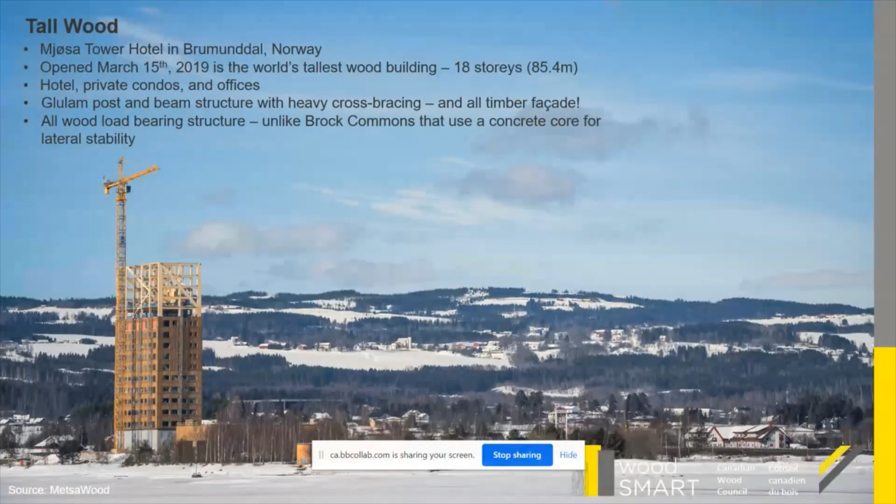So taller buildings are typically governed by wind vibration. The wind causes the buildings to sway at the top and causes basically motion sickness for occupants. The only way to prevent that swaying is to increase the mass of the structure. So the wood was actually too light, so they had to use concrete on the top to increase the mass and reduce the swaying, so people didn't get sick. Other than that, it's all wood. So you actually have a wood structure supporting concrete in this application, which is pretty cool.

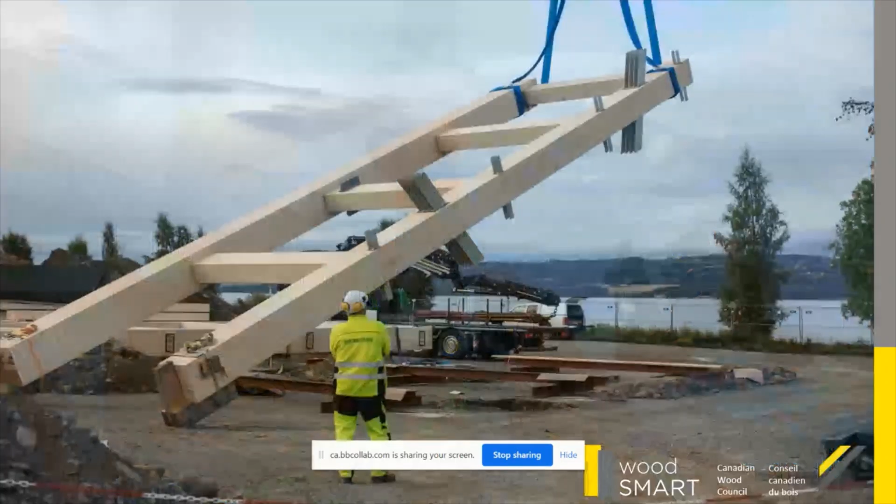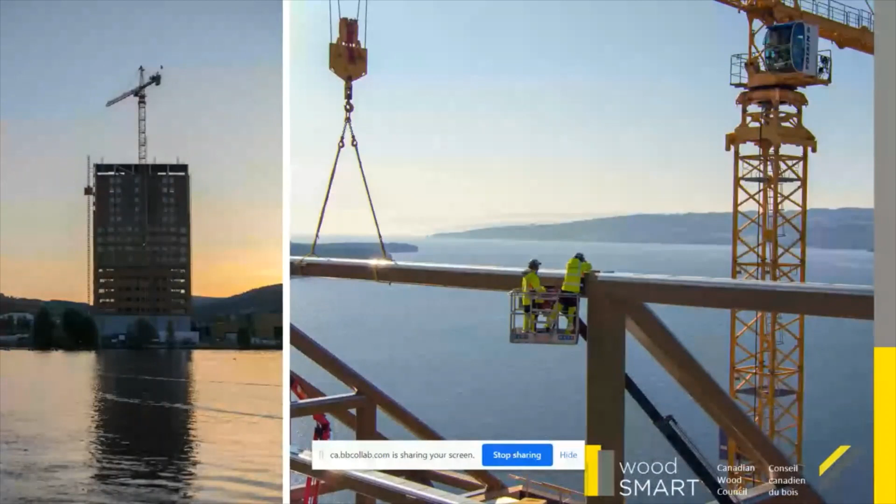You can see some workers here installing the main columns. Those columns are 600 millimeter by 600 millimeter, so 2 foot by 2 foot. So quite large elements coming together. The smaller components were made in a factory, and the holes and connections were installed off-site, and then near the site all the pieces were put together, so this is a 4-story frame of all the different components, and they craned it into place from there. It's on the edge of the largest freshwater lake in Norway, so you can see why wind would be a concern, because it's very exposed.

And what's really interesting about this is they used a wood facade. So this is like a thermal wood. So they basically take sawn lumber and they heat it up to a high temperature without it combusting, and it basically melts all the resins in the wood, and it makes them completely inert, so that they won't rot or be attacked by insects.

And actually it's very hard to ignite, and the flame spread is significantly decreased using that process. So they're able to use wood on the exterior, which is quite unique, because in North America, even 5- and 6-story buildings have to have a non-combustible exterior cladding.

You can see the lateral system consisted of these super braces. So you can see these huge super braces that were left exposed and kind of create a unique aesthetic in the rooms. The corner columns were 2 feet by 5 feet, so quite large elements. You can see just nearing completion there.

A quick time lapse of the construction process. You can see those frames being installed 4 stories at a time. And the elevator core is all CLT. You have these super braces going up the exterior of the building.

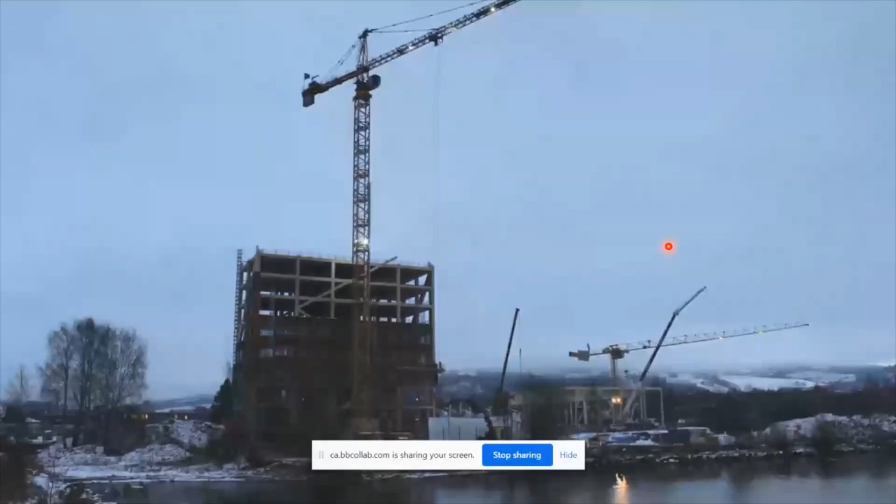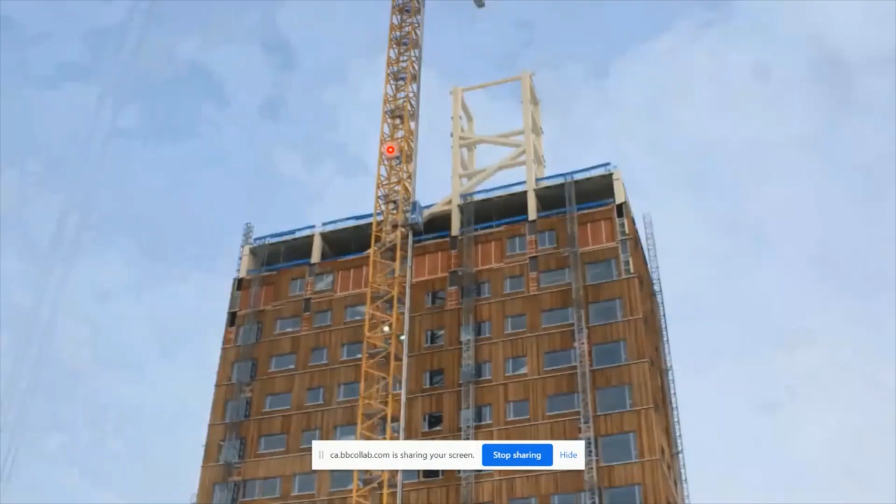Then again, they try and install the enclosure soon after construction, just to protect it from the elements and prevent driven rain and moisture from damaging the wood structure. And it's not going to structurally damage it. It's just going to create discoloration and stains. So they want to protect it to avoid that. It's a completed building there. It's pretty impressive.

So moving on, this is the last project I'll talk about, and one of my favorites. It's in China. It's called the Qingdao Pearl Visitor Center. It's in Qingdao, China, and it was designed by Bohlin Cywinski Jackson. So it's an all wood structure, and it serves as kind of a sales center for a new housing development, and would later become kind of a clubhouse.

So it's an all wood structure and has this really interesting undulating kind of wave roof that was created with NLT panels, and it's all supported on these round glulam columns that were inclined. So I think it's a good example that prefabrication and industrialization doesn't just have to take the shape of rectangular boxes. It can be quite unique structures and kind of free-form shapes.

So you can see there the inclined columns creating this kind of network, and the panels themselves had this cable truss system to create a really long span. So it was quite interesting.

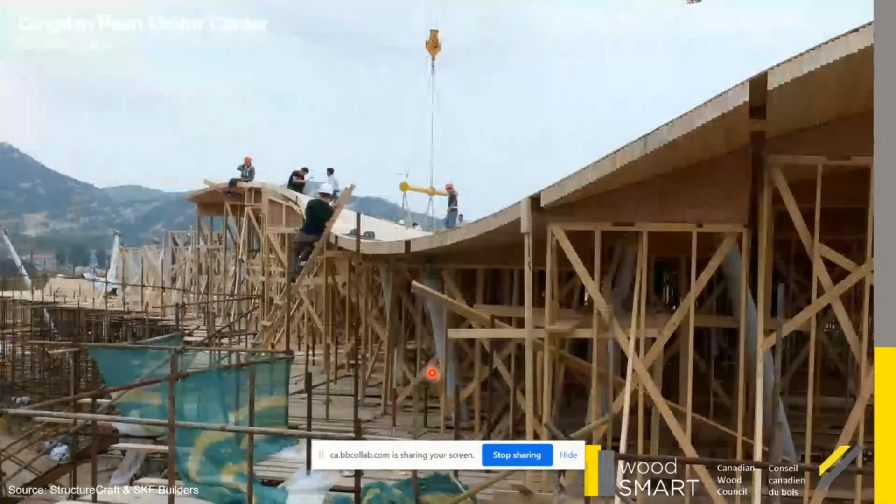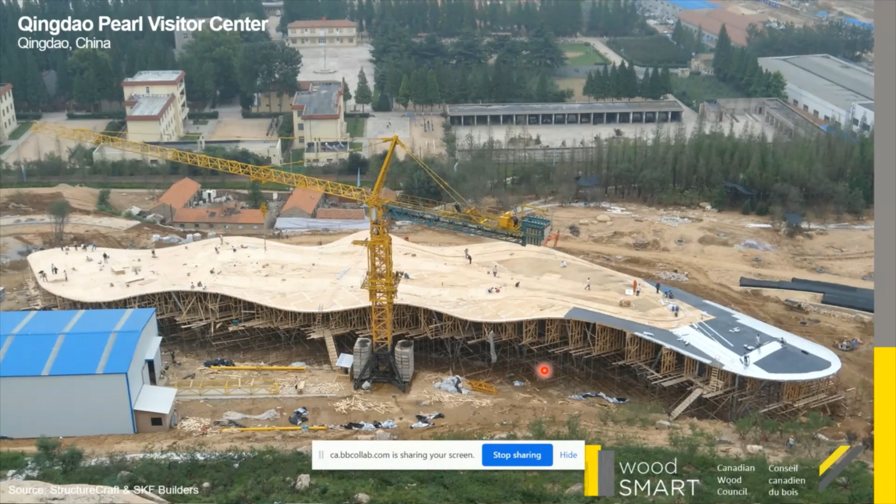You can see the panels being craned into place. They create this kind of really continuous wave shape. You can see this is the factory on site in the lower corner here, and then once completed, they would just be craned into place. As you see, it's quite a large roof area that was completed this way. But the end result is pretty cool, and it's a green roof on the top too, which is pretty neat.